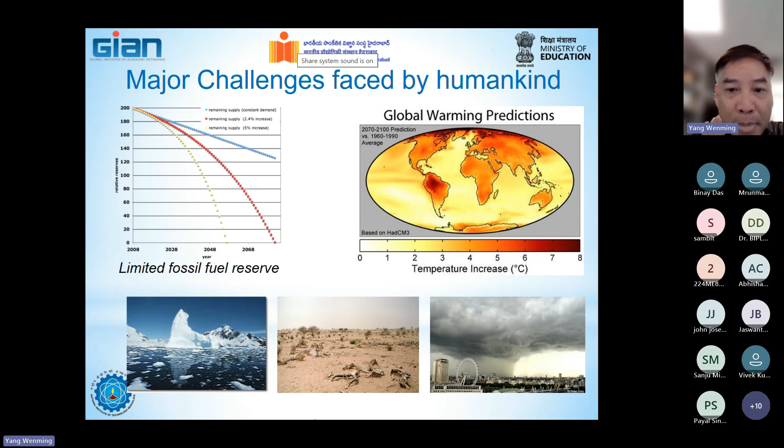Okay, so I also want to share with you guys some history. Maybe you guys don't know about this. In 1952, there was a great smog in London. We know there's a very long history of fog in London, especially on December 5th, 1952. A very heavy smog descended on London, and this fog remained in place for 5 days, bringing the capital to a standstill.

So what are the causes for this very serious smog? What do you think is the major cause of this smog? Any comments? Please feel free to comment. Dust particles and the water vapor in the air.

Okay, so in the 1950s, as we know, it's a few years after the Second World War, correct? So after the Second World War, the UK underwent a very long-term industrial revolution. In order to increase the economy, the industry developed very fast in the UK, and a lot of power plants were built, and they produced a lot of noise, a lot of emissions, correct?

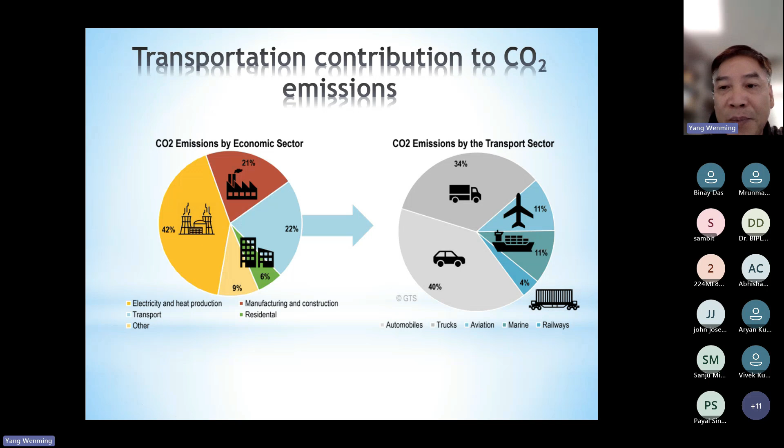categories. For example, automobiles or cars contribute 40% of CO2 emissions. Trucks contribute 34% of CO2 emissions. Aviation contributes 11% of CO2 emissions, and marine transportation also contributes about 11%. And railways contribute 4% of the CO2 emissions. So these are the major contributions of CO2 sources.

Okay, so how can we reduce the major emissions? Today I want to share with you three different aspects. The first one is engine modification. We can optimize the design of the engines so that we can improve the efficiency and minimize the major emissions.

The second one is a post-processor. By using post-processing technologies, for example, DPF, the diesel particulate filters, exhaust gas recirculation and SCR, all this can be used to reduce the major emissions from the exhaust gas.

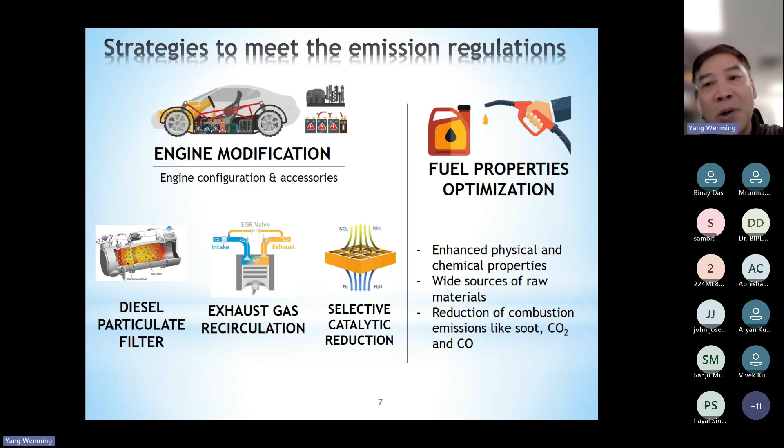And the third one is by optimizing the design of the fuel. In the previous lectures, I have introduced a lot of this knowledge, correct? So we can optimize the design of the fuel. For example, we can minimize the aromatic compositions, thereby we can reduce the CO and soot emissions.

With the presence of this catalyst, the CO can be oxidized to form CO2. So the chemical reaction is CO reacts with O2 to form CO2. And at the same time, the hydrocarbons, the unburnt and partially burnt fuel, also can be oxidized to produce CO2 and water.

Okay, so this is a two-way catalytic converter. It was used in the earliest stage of the transportation system. However, this kind of two-way catalytic converter is rarely used now. Instead, it is replaced by the three-way catalytic converter. With this one we can remove CO and hydrocarbons, and also remove NOx emissions.

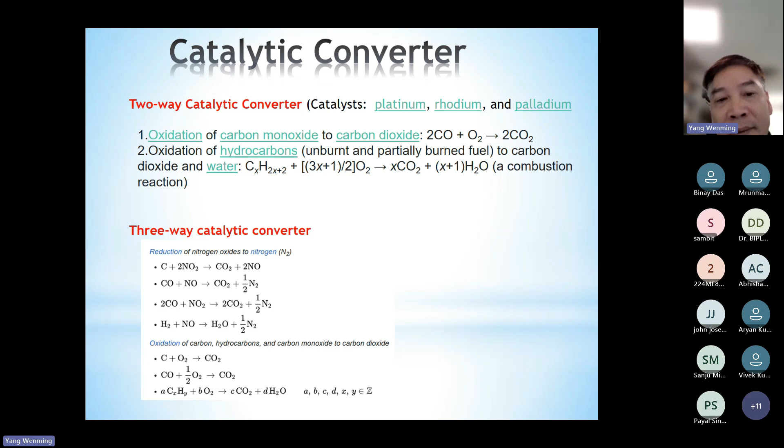Okay, the next one I want to introduce is diesel exhaust gas post-treatment. The previous one is more commonly used for gasoline engines, and this one is used for diesel exhaust gas post-treatment. Usually we have three post-processors. The first one is a DOC, diesel oxidation catalyst.

This one functions similar to the two-way catalytic converter, so it can convert hydrocarbons and carbon monoxide into CO2 and water. So this is the function of the DOC: it converts CO and hydrocarbons into CO2 and water.

Okay, then the second post-processor is a selective catalytic reduction, or SCR. And for SCR to function, usually we inject urea into the exhaust gas here, the diesel exhaust gas. This urea can help to reduce the NOx emission.

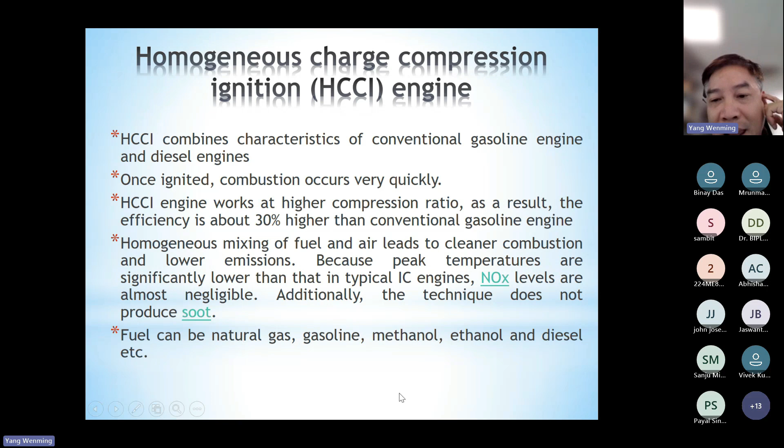For gasoline engines, the flame starts from the spark plug and then travels from the spark plug to the cylinder wall. During this process, between the combustion products and the unburnt fuel-air mixture, a very high temperature zone forms. This is the flame front, and it has very high temperature.

Under these conditions, a lot of NOx emissions will be produced because of the high temperature in this region, in this flame front.

For diesel engines, similarly this region also produces very high temperature, and these engines produce a lot of NOx emission and also soot emissions, because in this region the fuel ratio is usually greater than 1, so the fuel is partially oxidized to form carbon and soot emissions.

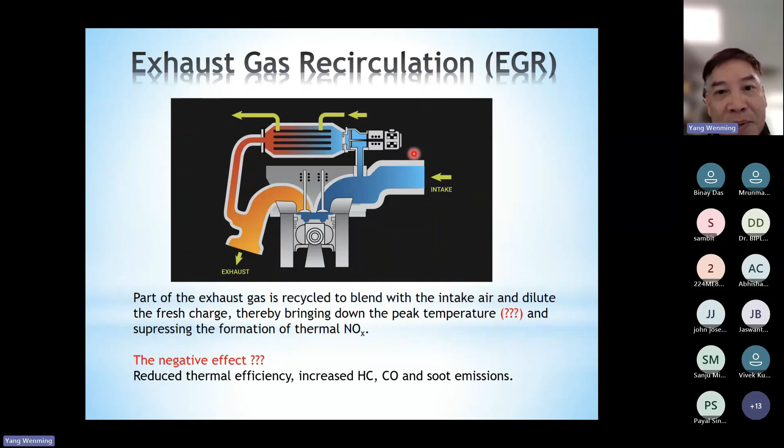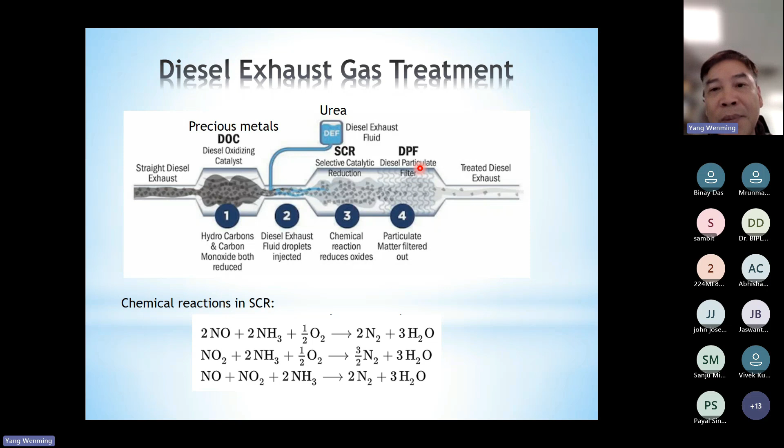And the efficiency can be increased, firstly, due to the higher compression ratio, secondly, due to the fast combustion process. It also can eliminate the aftertreatment system because the exhaust emissions are almost zero, correct? So we don't need to employ costly aftertreatment systems like DOC, SCR, DPF, because we don't have these kinds of emissions. So we don't need to use a DOC, we don't need to use an SCR, and also we don't need to use a DPF.

Of course, these are the ideal conditions. In ideal conditions, we have these advantages: high efficiency, near zero emissions. So is there any disadvantage for this kind of engine? You can guess first. Do you think there are any negative effects of these engines? Fuel injection becomes very complicated. Okay, yeah, it's more complicated because we have two fuel supply systems, correct? Very good. Any more?

Ultimately, the price of the vehicle. Mm-hmm. Okay, actually similar to HCCI engines, because most of the fuel is premixed, correct? So once ignited, the combustion process will be very fast. As a result, the peak pressure will be very high. So this also has the potential to damage the engine. So for RCCI engines, similar to HCCI engines, the engine is only able to work at partial load conditions, no load to medium load conditions; it cannot work at high engine load conditions.

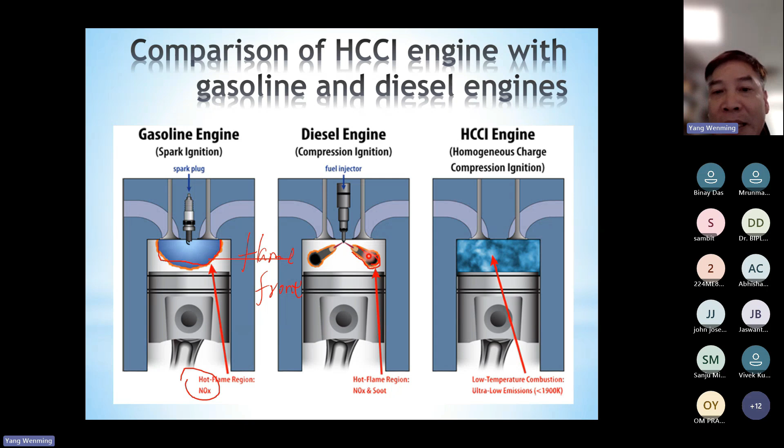For diesel engines, the average temperature, even at its highest value, is only about 1,600 K. However, the peak temperature is much higher: in this region, the temperature can be as high as 2,800 K. So for diesel engines, the temperature is not uniform. Some regions have very high temperature, some regions have very low temperature. This is different from HCCI engines and RCCI engines. For RCCI engines, the average temperature is higher than that of diesel engines. However, the peak temperature is much lower.

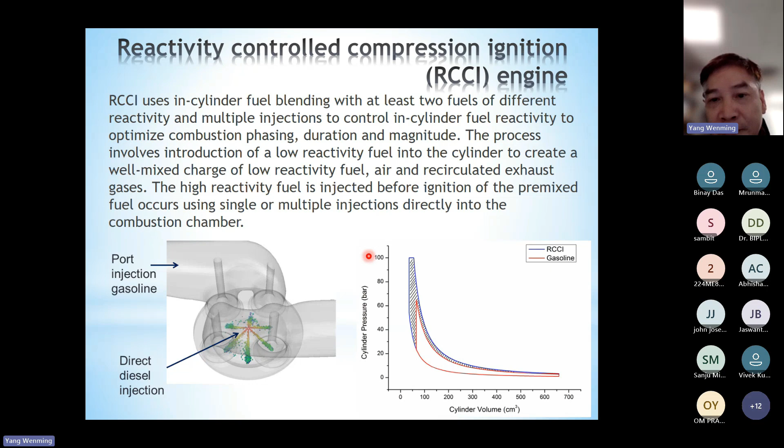Sir, are these engines used in normal daily use automobiles now? Are these engines in production? Is any company using these engines? Okay. Currently, research has been conducted by many researchers. However, the technology is not mature at this moment. Some companies investigate or design them and have conducted some testing. However, they also face some challenges. For example, higher cylinder peak pressure, and they can only work at low or medium engine load conditions, so the power range is limited compared with diesel engines. That's why this technology is not mature yet.

And also, these engines usually need to use a higher EGR ratio. This can also promote the formation of HC and CO emissions. Theoretically, it's near zero. However, because of the employment of EGR, the HC and CO emissions will be increased. So there's no single technology which can totally eliminate all the emissions.

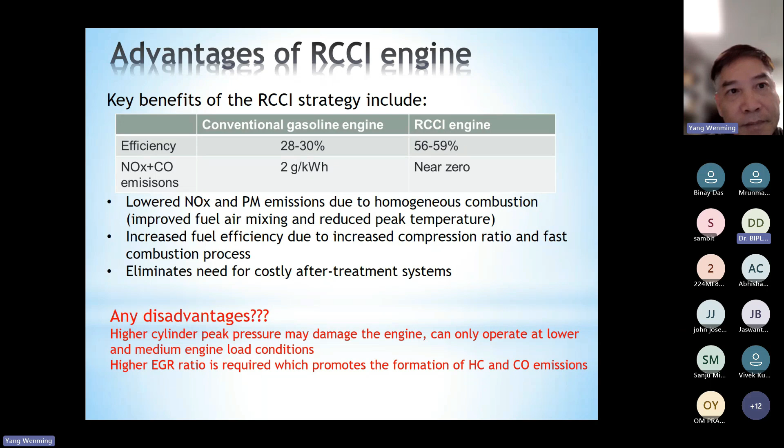Okay, any more questions? Sir, continue, sir. They may ask questions after the presentation. Okay, sir. Okay, so let me.

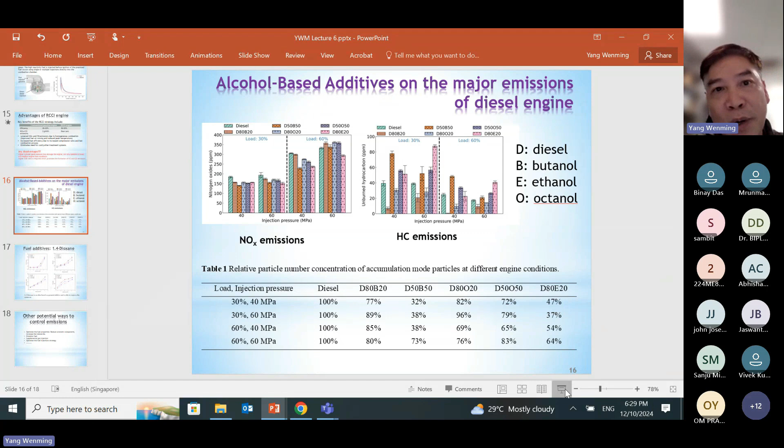The next one, we spend about 5 minutes to finish this lecture. The next one is alcohol-based additives on the major emissions of diesel engines. Basically, we investigated 3 different additives, alcohol fuels: butanol, ethanol, and octanol. Firstly, it compares nitrogen oxides, NOx emission, and also compares the HC emissions.

Actually, we cannot see any obvious trends on the NOx emission. It's more or less quite similar. Some of the blend fuels have higher NOx emission, but some have lower NOx emission. So there are no obvious trends. And for the HC emissions, some of the fuels have lower HC emissions, some have higher emissions. We cannot get

linear conclusions. However, for the soot emissions, compare D80 and B20, D80 and O20, and D80 and E20. Compare these 3 types of fuel. These 3 blend fuels contain 80% diesel and 20% fuel additives, but with different carbon chain lengths. Ethanol is the shortest, followed by butanol, and octanol has the longest carbon chain. So we compare its impact on the soot emissions.

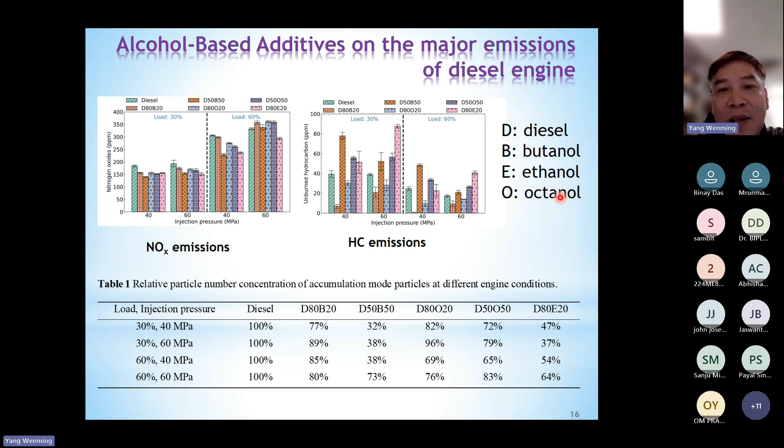Of course, there are some other potential ways to control the emissions. For example, optimize the fuel properties; we introduced this in the previous lectures, so I don't want to repeat. We can also increase the cetane number by using 1,4-dioxane, and there are some other fuel additives that can increase the cetane number. And we can use emulsion fuel.

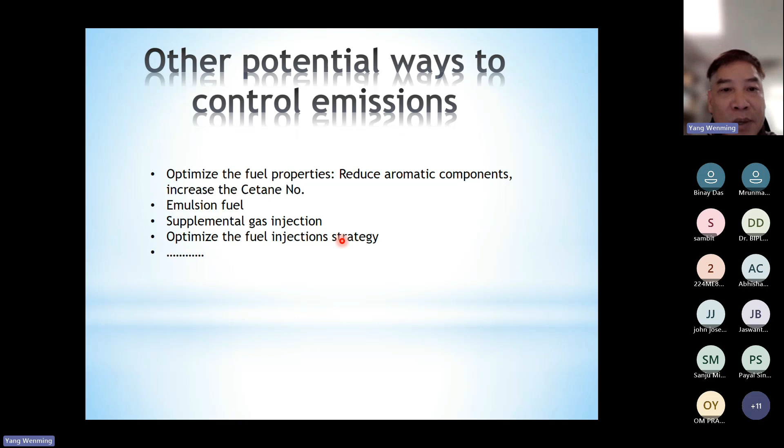This one we will introduce in the next class. We can also use supplemental gas injection. These two we are going to introduce in the next class. And we can optimize the fuel injection strategy; this one was introduced in the previous class already, right? So that's the end of this lecture.

Any questions? Yeah, participants, you are now open for any question.